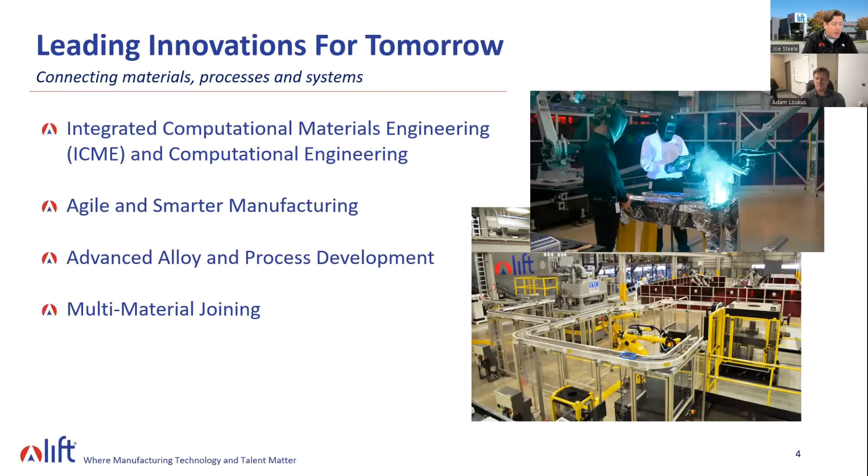A little bit deeper dive here, all the way from ICME, integrated computational materials engineering, which is where we're modeling and simulating these materials and manufacturing processes on the virtual side, and then taking them into the physical world with advanced alloy and process development. See some of the things we're working on with lightweight armor development and rare earth materials and hypersonics materials development.

Then, as we're developing and working with these new materials, how do we join them together? Are there new ways we need to work on there? As we develop these materials, can we model the joining in a way that we know what we're doing when we need to join them, and they're, again, fit for purpose?

And then finally, agile and smarter manufacturing. Are there new ways of doing things? Can we be more nimble as it relates to some of these processes, like additive manufacturing? Can we metal additive? Can we use wire arc for that? Can we use cold spray technology? Can we use incremental sheet forming to form parts and pieces out of sheet metals? All of that is happening throughout our ecosystem and here at our Detroit headquarters.

A little bit about our Learning Innovation for Tomorrow talent program. This is all, again, still about innovation and new ways of doing things, but now we're talking about new learning tools, new pathways, new venues. And that really starts with our Lift Learning Lab, here at our Detroit facility, perched above our high bay. It's our pilot plant, if you will, for new curriculum, new ways of teaching students advanced manufacturing in 2022. Bring students in here, bring teachers in here, bring industry here, learning what we need to know to help educate those manufacturers of the future.

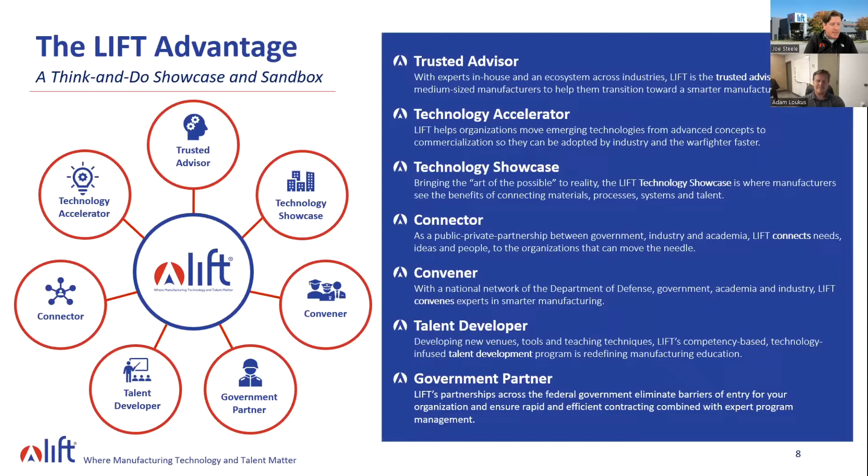The federal government can be an unwieldy place, a bureaucratic place, a challenging place to start working with, particularly for our small to medium-sized manufacturers and members. So we provide that conduit to make accessing that a little bit easier and to try to help move those innovations into the DoD as quickly as possible.

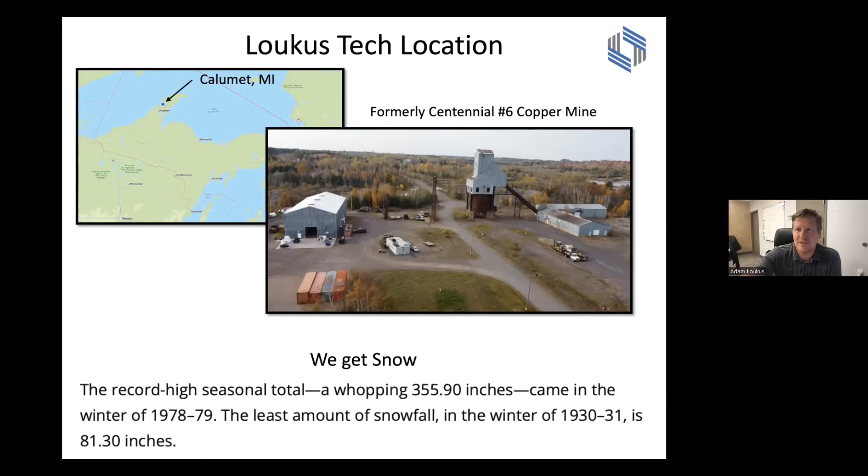We have Michigan Tech University that's 15 miles south of us. So we have a unique set of individuals from the engineering side that like what the Upper Peninsula of Michigan has to offer, as far as we don't wait in traffic like a lot of different areas in the world have to. My big complaint of the year was with all the tourists coming to the area, I had to wait for like 30 seconds to get onto US 41, the main highway coming through town. So yeah, we get a little bit of snow, but it does leave for a couple weeks during the year, which is great, and we're in that time period right now.

Giving an overall view of what we have as far as capabilities, we're not just a think tank type of place.

We have commercial size equipment. We tend to do a lot of R&D here on our squeeze casting presses and low pressure casting presses and building of ceramic preforms for reinforcement and metal matrix composites. I'll talk a little bit more about the details of each as we go through it. So a bunch of equipment.

We have in-house analysis capabilities as far as having an SEM in-house for looking at microstructure. We have the ability to do material testing in-house, as well as work with Michigan Tech on some of the more advanced testing that they have capabilities down on that end. So we have enough equipment to be dangerous.

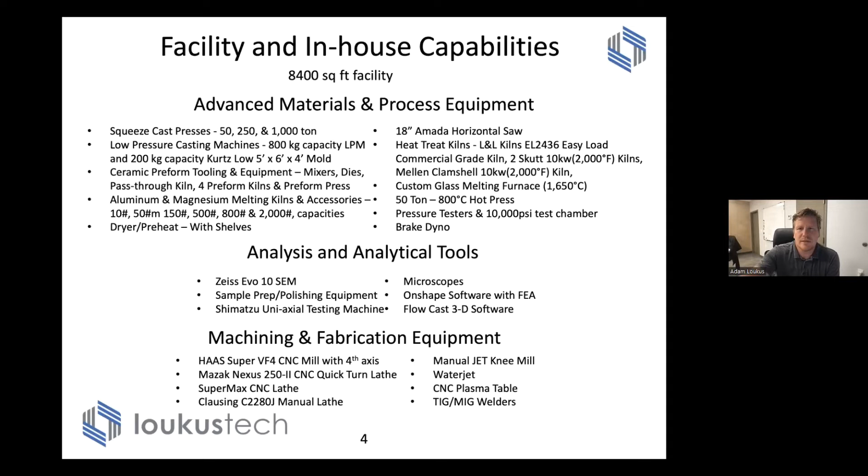We tend to develop on the front end, but we can not only think of how we're going to combine materials in unique ways. We have the ability in-house to design the tooling, build the tooling, and build the equipment required to make it happen. So that's a quick overview of our facilities.

Company history and technologies that we own. Like I say, some of these technologies we developed over the last, I'm going to say since 2006, 2007. But now we brought these technologies in. Each of these kind of gives us a new asset of what materials we can do in-house and how to approach certain problems. There's not one right way to approach a materials or unique materials solution.

Sometimes it might be casting, and that casting can be gravity casting, low pressure casting, squeeze casting, high pressure die casting. Sometimes it's forging, sometimes it's extrusion. From our perspective, we don't care.

The one thing I'd like to highlight where I think we're slightly unique is that we'd like to see where you can combine some of these casting technologies, some forging, some extrusion, and then combine that with some of the 3D printing, the meld technologies, the wire arc additive manufacturing stuff to see how we bring these products in the best way, right? We have all these unique capabilities, new technologies that are coming out, new alloy systems.

We're not tied to, hey, we must squeeze cast because we have squeeze casting equipment here. We don't have to low pressure cast because we have that equipment here. We'd like to see what makes sense and how do we combine each of the attributes of each of these and move those forward. So this snapshot of some of the products you'll see here are combinations and how we approach certain materials and how we develop the product based on that.

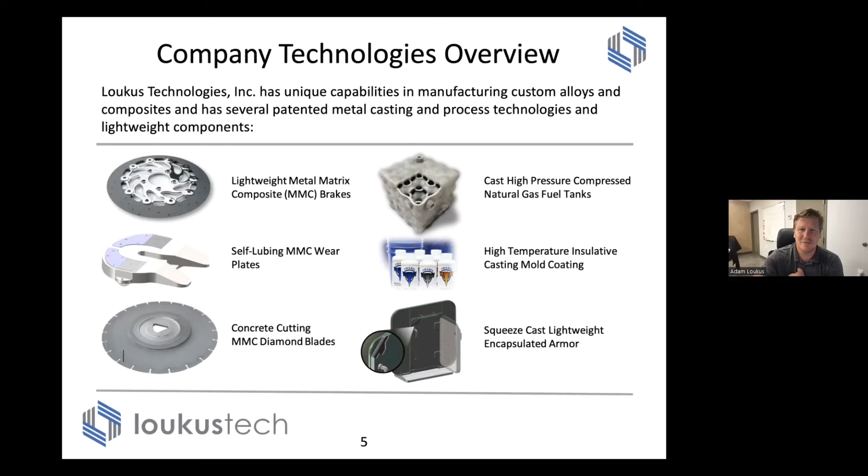I'll give maybe some lessons learned in each of these areas really quickly. Our first product, as we came through, we said, hey, we have some unique capabilities in making, we have some unique capabilities in aluminum and ceramics. Quick story on this is my background is in aluminum metallurgy, aluminum hydroforming, so I did my PhD work in that. My brother's was in ceramics machining, that sort of thing. So well, why don't we combine the two of them, make something that makes sense?

So a brake application, you know, why not pick the one thing that everyone said couldn't be done, right? Several billion dollars have been spent by some of the smartest people in the world, large companies, large research institutes. And we said, yeah, well, how hard can that be, right? So anyway, we combined the two, making a metal matrix composite.

On paper, it is the best way to approach braking, right? You can get 3 to 4 times longer life than cast iron brakes. You can be less than half the weight. The motorcycle rotor that you see there took out half the weight of a Harley, the brake system of a Harley Davidson. One of the rotors, right upper right corner, I put those on my car and it saved over 40 pounds in a brake system.

We developed a whole process for making these things, nearly put the company out of business as we had purchase orders in 2008. Half the bike builders went out of business, and long and short of it, we realized that while you may have a great product and a great material solution, the market also has to be there and waiting and willing to buy your product at the price point that you can make it at.

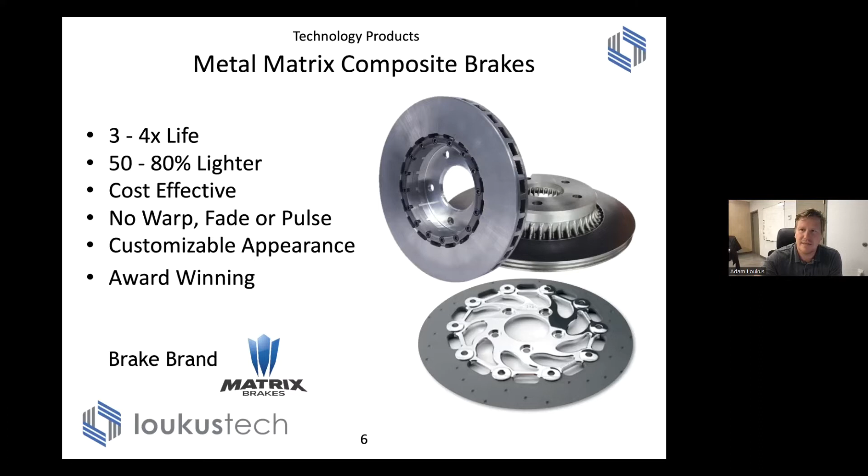As you look at all electric vehicles, the influx of hybrids and things like that in the market, I just truly believe that this technology will have life moving forward. It just wasn't the time and the place when we launched it.

Another unique project we got involved in - we thought, okay, we're squeeze casting guys now, right? So we said, well, there was a unique opportunity with ARPA-E launching a program for a conformable gas tank for storing high pressure natural gas. Back in 2012, the price of gas was similar to what it is now, so there was a big push to look for alternative energy systems for vehicles.

The problem with high pressure gas is primarily those are stored in cylindrical tanks, and if you want to use CNG for vehicles, you have another toolbox in the back of your vehicle that takes up all of your bed space. The idea was, can we make a conformable shaped tank that can hold 3,600 PSI? But not only that, from a safety perspective, you have to hold 2.25 times that as burst pressure. So the tank we developed had to hold 8,100 PSI of gas pressure inside of it.

Approaching it from a material standpoint, we used high strength aluminum alloys with unique processing capabilities, because while you may have high strength in certain aluminum alloys, they don't necessarily want to flow into the shape you see here. So we developed different field-assisted techniques to get that material to form into the shape, have the strength characteristics we need, and design the right geometry and flow characteristics for a final tank that will hold pressure, be pressure tight, and have the right strength characteristics.

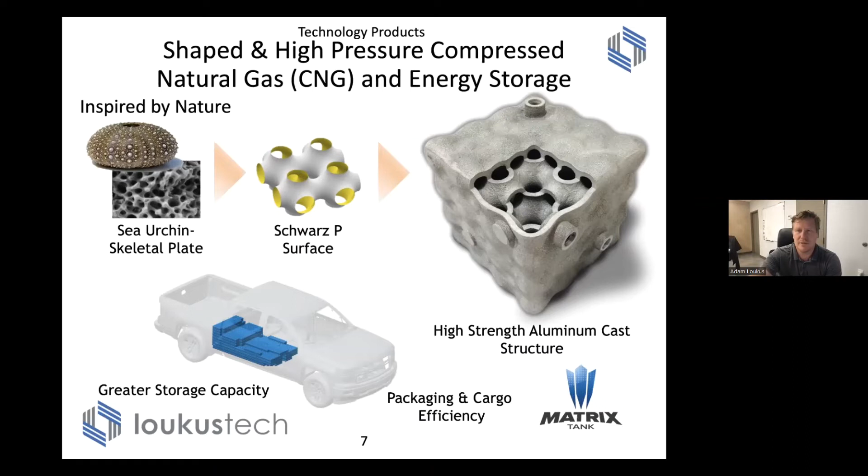This was developed using 3D printed sand molds, primarily for the shape. We stole from nature, using the skeletal plate of a sea urchin, developed that into a Schwarz P surface, and 3D printed some sand cores. We put this in a low pressure casting machine and added a bunch of field-assisted approaches - vibration, added power into the melt as it was being formed. We were able to get a 7075 and A206 to cast in shapes that people said couldn't be done - just approaching it from a different approach than what the market said was acceptable.

As part of the process, we needed to get metal into places where it typically didn't want to flow due to early freeze-off, so we developed an insulative casting spray. The texture looks like the felt of a pool table when sprayed onto a mold. This was spun out of work we'd done many years ago for NASA, where we developed a patch kit for the space shuttle after the Columbia disaster - a high alumina binderless type system. We then took that technology and thought, if it works as a patch kit for the space shuttle, if we alter it so we can spray it onto a mold, that'll give us the insulative properties we're looking for.

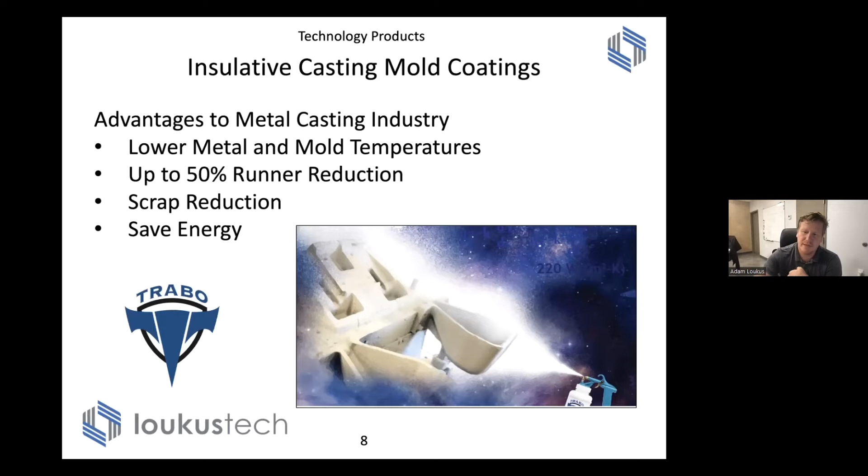This allows for runner reduction, scrap reduction, and casting metals at lower temperatures than what's typically possible. This is a technology we use in-house on a day-to-day basis, kind of our competitive edge. We do sell some of this commercially, but primarily it's allowing us to cast shapes and alloys that typically can't be done elsewhere.

Being able to combine the next two slides I'll go through quickly - combining ceramics with aluminum gives you an ability to tailor properties that typically wouldn't exist in a typical alloy or in a composite solution that didn't have the metallic side.

This is a fifth wheel wear plate. It sits on the back of a semi, where the connecting plate slides in here, and the kingpin from the trailer slides into this point, so the weight of the trailer tongue sits on here. These are typically greased - hundreds of thousands of gallons of grease go onto our roadways, which leads to an environmental issue. For instance, in the state of California, you have to stop, decouple your trailer, wipe the excess grease off these plates, and recouple before you're able to enter California with some of these semi trucks.

So we said, well, can we build the lubrication right in? We modified our MMC composition, adding graphite and tungsten disulfide into the mix, and we were able to cut down the wear of these plates and get the lubricity we needed. I'll talk about the commercial play on both of these things together.

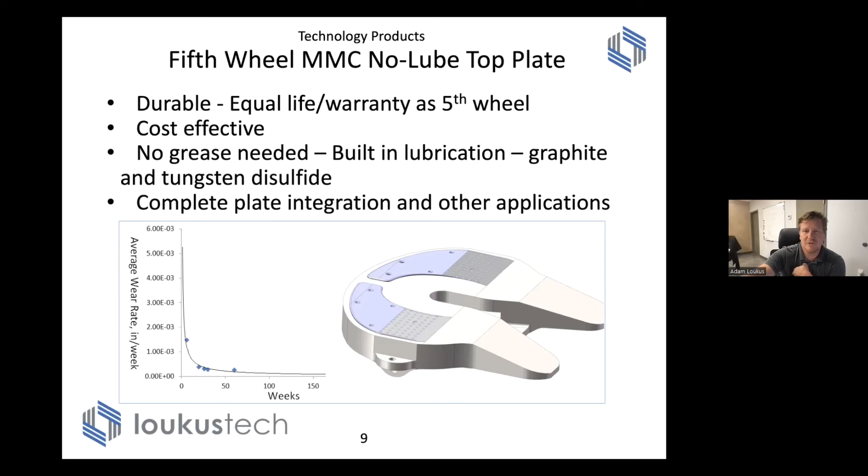Same thing here, let's put diamonds into an MMC. Now can you cut concrete? It's about tailoring material properties where you need it. You have the high thermal conductivity of the hub, similar to what we had on a brake rotor, and you get the super wear resistance out of diamond, one of the hardest materials known to man.

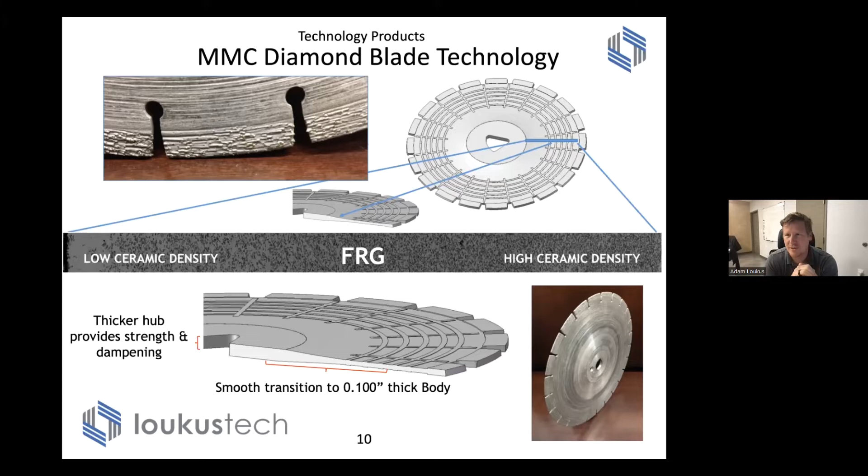Combine those two together, cast the whole process, and you have a unique product. Both this and the former product were unique, but the market wasn't quite ready for them, or we as a company weren't quite ready to launch them. So trying to get the right partnerships on both of these fronts is something that's still in the works.

Getting to some of the more recent projects we're working on right now, we're working on an SBIR project where we're trying to reduce the weight of a mortar base plate, using some of the combined MMC technologies that we've developed over the past decade, or in the last 15 years, I can't believe I'm that old to be able to say that.

We're combining that using an in situ nano MMC that we developed with some high strength aluminum alloys. We're able to take these mortar base plates down - an M81 base plate goes from 23 pounds down under 17 pounds. We believe our next rendition would be closer to 15. So not an easy application.

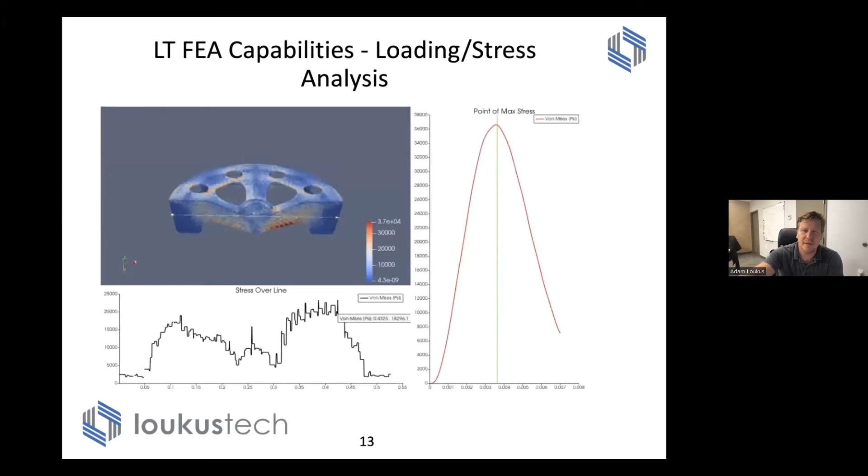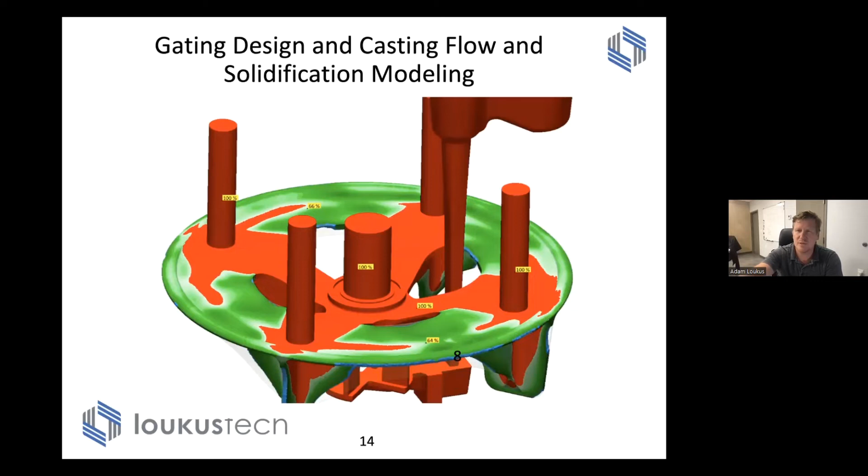This project, we worked with EC Industries, another Lift member. We worked with them on this, and some of their casting and flow modeling design and gating design went a lot into this project. Just from a timing perspective, we went with a gravity cast approach versus what this will likely be in production, low pressure or a squeeze cast approach. What it allowed us to do is make a thin wall, typically thinner webbed region than what you can form with your typical A206 and 7075 alloys.

Got some pretty impressive properties out of them. We did some internal testing and we're actually sending these out, hoping that we get through to a phase 2 SBIR, because there's quite a bit of testing that still needs to go through. But I think we're definitely on the right track on this nano MMC approach that we've attacked this with.

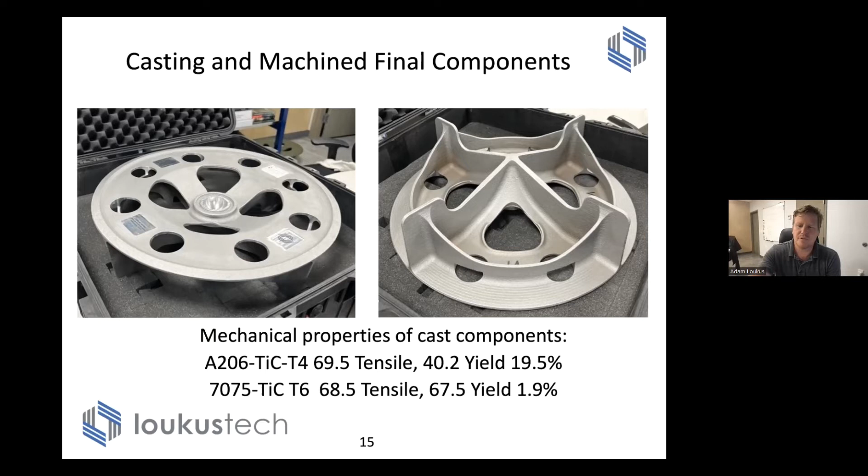To give you an idea, grain sizes are less than 10 micron. We've got these real tiny particles in there, somewhere in the range of like 100 nanometer size.

That also accentuates our internal capabilities. Yes, we have a Zeiss Evo 10, similar to what Lift has in their high bay facility down in Detroit. But just the ability to cast something in the morning and be able to look at it in the afternoon, and be casting something else and revising your approach on a materials project, is something worth investing in. Even us as a small company, we said this is a key tool for us to have at our disposal.

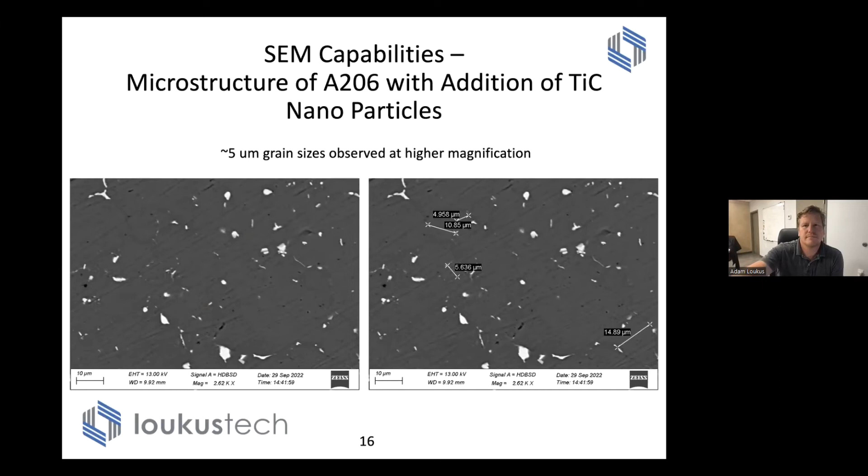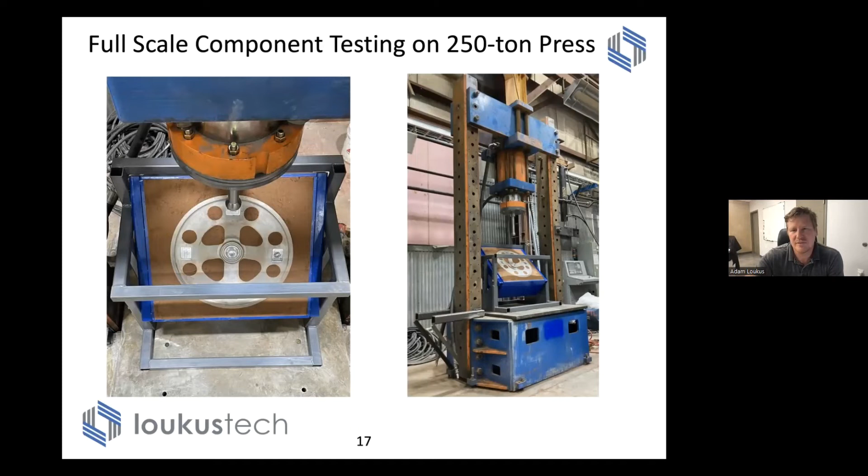So the other part of what makes us a little bit unique is doing some of the testing that we do on the components, building the presses, building the unique setups. We can do that right in house. Our background in equipment design and build allows us to look at processes and develop materials and test them to make sure that they're actually going to work when they make it to the field.

A unique area capturing a lot of attention is this in-situ nano MMC type of approach, having the ability to develop or form many different types of nanoparticles inside of aluminum matrices in the initial stage. Titanium diboride is a common grain refiner in aluminum alloys, and we're forming that in situ in small particles. We're also forming titanium carbide and alumina. You can form a bunch of real small particles in the melt, and it has some unique properties seen in the final MMC.

Not all of it we can explain right out of the gates, but the castability enhancement and reducing hot tearing in some hot tearing prone alloys is something that made it worth pursuing this quite a bit further.

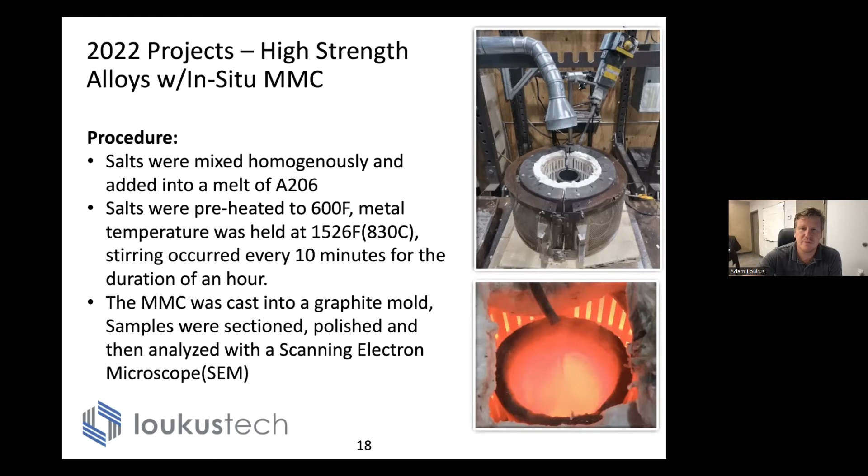Other project work with ARPA-E was developing a high temperature bushing to replace platinum and rhodium in development of continuous basalt and glass fiber.

To give you an idea of why we care about this: the use of composites is growing in the automotive market, military markets, and in rebar used in concrete applications. The problem is, if we just grabbed all the continuous fiber made in the country right now and turned it all into FRP rebar, fiber reinforced polymer rebar, you could only do 11 miles of a 6-lane freeway with that. So we don't have enough in-house capability, or we don't build enough glass fiber to start with, to actually hit all these applications where it makes sense.

FRP rebar's advantage is that your roads don't degrade, you don't have rebar that's going to rust and cause cracking. For bridge structures, there's a lot of reasons FRP rebar has advantages, more than double the life of bridges and roads. You can't get there because one of the main hindrances is the investment you need in platinum and rhodium, just purely in the bushings.

To give you an idea what a bushing is: it's a plate with a bunch of holes in it. You have a mass of molten glass or basalt above it, and it drips through those holes. You grab that and wind it on a spool, making the tows of fiber, which then get wetted out by the polymers in a subsequent process. Whether it be layup, those get woven into 2D fabrics for multiple different applications.

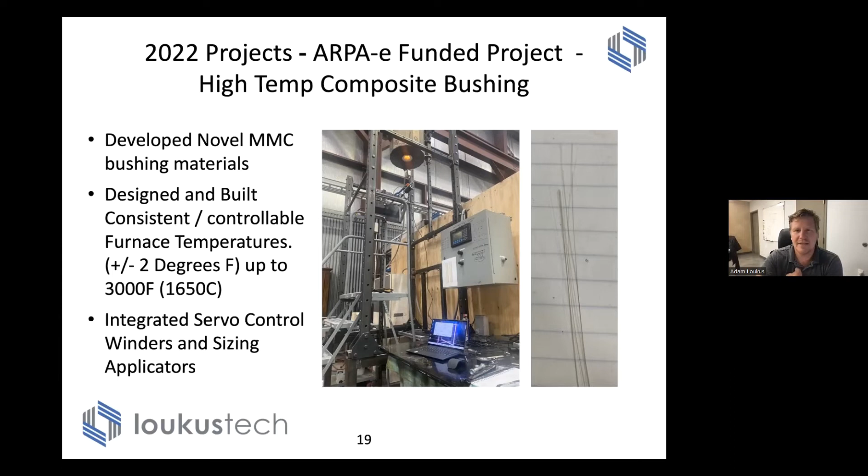So that's how we approached this, looking at developing an alloy that could withstand continuous high temperatures essentially forever. They don't want to replace these bushings maybe once a year, right? It has to hold up to 1250 or 1300 degrees Celsius in an oxidizing environment, and it also has to have the right wetting angle so it doesn't get wetted out by the glass or basalt fiber flowing through it.

So this was a set of material challenges. It turned out to be a bit humbling, understanding how materials interacted, wetting behaviors, and then also being able to tune in a manufacturing process that you could control within a couple of degrees to be able to develop a fiber.

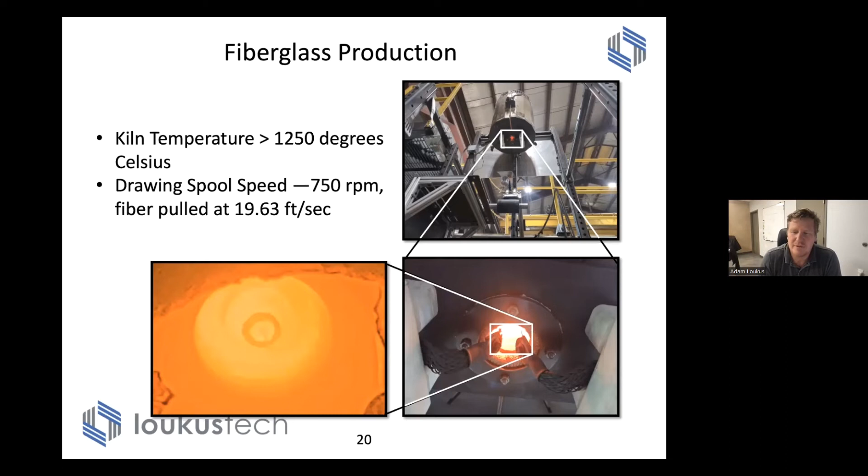By the end of it, this was a 2-year project. The video you see on the right is pulling a single 10 micron diameter strand of glass fiber through the bushing we developed. A lot of commercial bushings have 4,800 strands of glass, but we just proved we can do this on a single strand basis. We have the process control to do this. Now it's just a factor of scaling up the bushing technology and building bigger plates, bigger furnaces.

So that taught us a few things about how we have to approach some of these material challenges that are not brake related, which was, okay, 400 degrees Celsius.

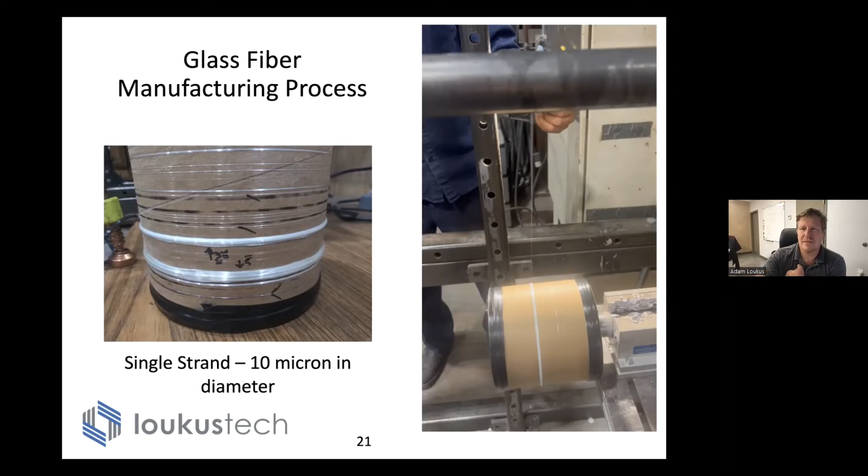You can combine aluminum in there, and there are some magnesium applications in that range. But when you jump to 1250 degrees and need it to last forever, your list of candidate materials drops significantly. You might look at approaches where strength matters, say okay, let's use tungsten carbide—that works great for hardness and temperature if it's in the right environment.

So going through a lot of material selection and down-selecting to a final MMC that works was definitely a considerable challenge. We're still pushing this work forward in the coming months. Looking at how we've worked with Lift in the past few years, there have been some cool projects that not only met Lift's mission but also increased our internal capabilities. One of those is a rotor we developed in the past.

We always looked at how to optimize the ceramic component of the rotor, and that was our focus as we launched the motorcycle brake rotor, and really any type of brake. We tried to pick an aluminum alloy that was available, cost-effective, and high temperature, and hoped that would be enough.

With the advent of many new aluminum alloys that eliminate a lot of the lower melting point phases and can handle 450 degrees Celsius while still maintaining hardness and phase stability, we're looking at how to optimize that aluminum alloy—how to optimize this metal matrix composite while keeping a consistent ceramic sponge on the other side.

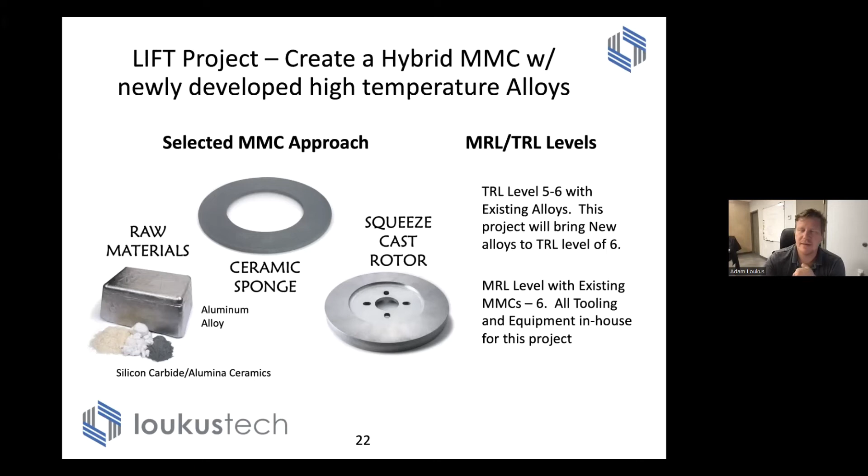Another project we worked on with Lift, using their high bay space, was looking at some magnesium alloys we were working on for a different project and tailoring them for a high ductility application. We cast several different alloys and extruded them at Lift's high bay space, bringing our induction unit down as a preheating billet heater prior to extruding. We got some pretty unique properties to meet the application we were targeting.

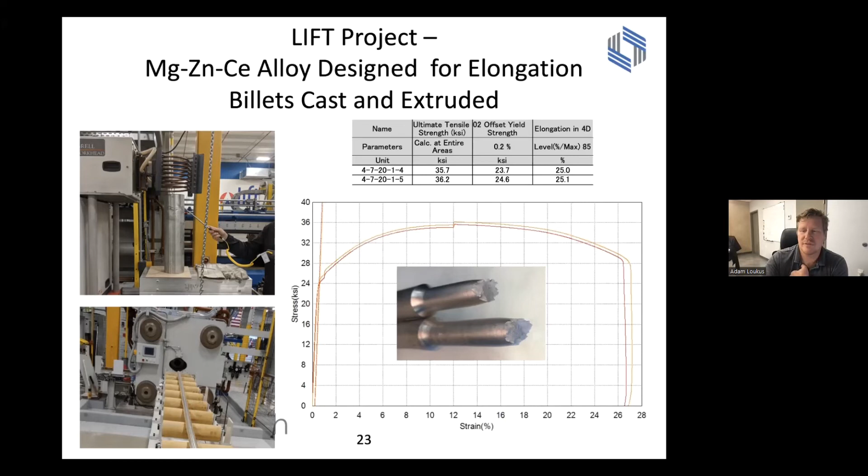This was a successful project, one of our early Lift projects, and some of that knowledge fed into what we do now. In some cases it makes sense to launch products that are cast or forged, but a lot of times if they need to be forged or extruded, you need a billet to do that.

So we have the ability in-house to cast multiple different alloys. We cast different size billets, all the way from 3.5-inch diameter billets that we extrude at Michigan Tech, to 6-inch diameter billets we extrude down at Lift, and 8, 9, 11-inch billets that we work with different commercial partners to extrude in multiple sizes and shapes of aluminum and magnesium alloys.

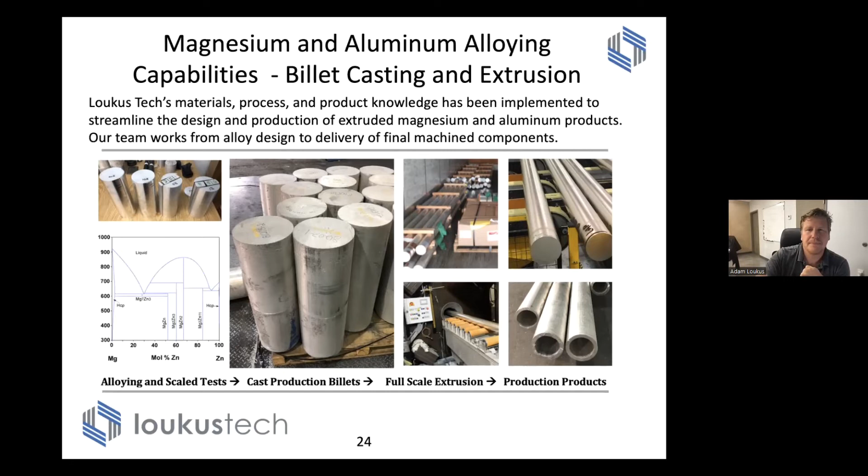The other part we pride ourselves on—maybe we're exuberant about what we think we can or can't do—is some of the custom castings we work on with partners, like vibration fixtures used in aerospace structures, putting in a certain frequency, checking mode shapes, and seeing how different structures are accelerated.

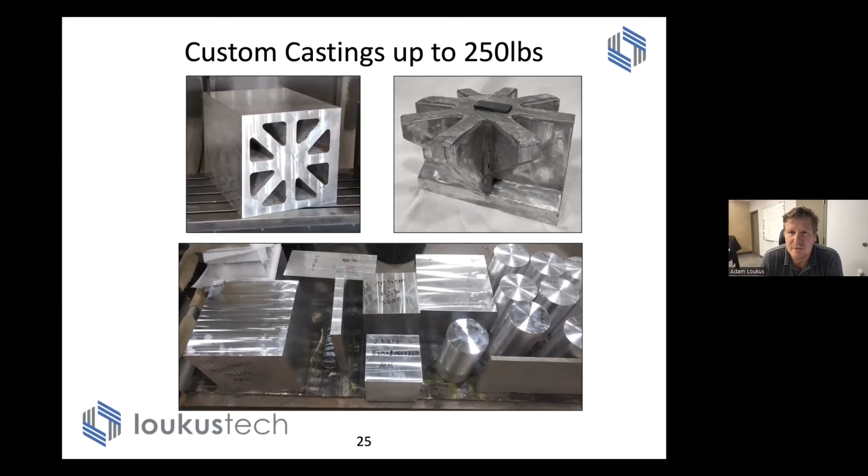So a lot of things for head expanders, which are often made out of magnesium alloys—we cast some unique, big shapes for those applications.

So in closing, we have a few minutes. We've developed and have 13 issued patents, and we tend to spend a lot of time in some pretty high markets. Those large markets aren't always open to new technologies or new competitors. But the way we get around that as a small company is by learning how to team with larger partners that are already in that market, or who are open to new technologies.

We've spent a lot of money developing our IP, developing our processes and approaches to these products. And at the end of the day, people have said, hey, you've got something worth pursuing.

We spent some time developing a patent portfolio that opens the doors to several different markets for us, or helps protect us in several of these different markets that we're addressing. And the idea that, hey, we have a toolbox.

We definitely want to see where we can take the conventional manufacturing and add some of the 3D printing aspect. We use some of that internally as part of that process, like the ExOne sand printers for the tanks and some of the castings that we do. But how do we combine that even further, where you'd say low pressure cast one part of the component and then print some of the features on it? That's a couple of projects we're working on in that direction.